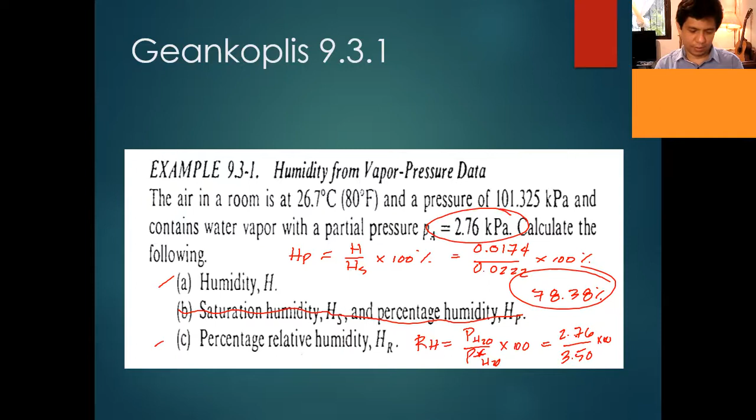So PH2O, ito yon 2.76 kPa, tapos divide natin nung 3.5. Kung tandaan nyo pa, ito yung galing steam table, tapos times 100%. So ang relative humidity is 78.86%.

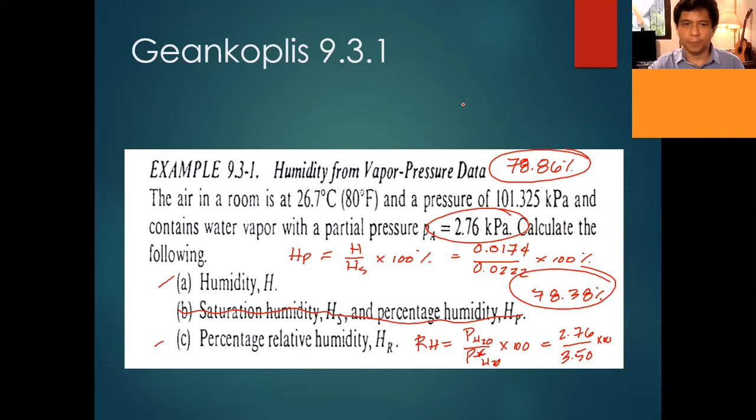Do you have any question regarding this problem, regarding the calculation of humidity and percentage relative humidity? If you don't have any question, probably it's better for you to perform the exercise on BBL. Go to BBL, meron tayong problem doon, try to answer the exercise, humidity calculations.

Kita nyo? Ano tayong exercise sa BBL? Bilisan nyo lang para mas marami tayong mag-discuss. I'll try to find the exercise in my slide. Nakita niyo na yung exercise?

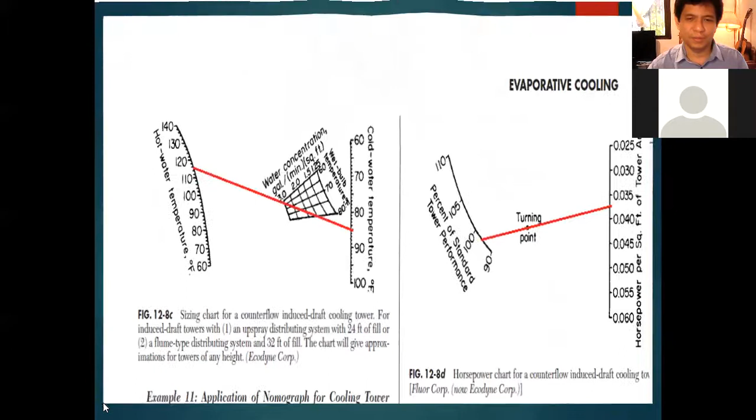Aside from dry bulb (TDB), this is the actual temperature of air. Then there's the wet bulb - if you saturate the air with water, generally the temperature will drop. That's the wet bulb temperature. And then there's another temperature, the dew point. If you recall, the dew point is the temperature at which a given air-water mixture will be saturated at constant humidity. This is known as the dew point.

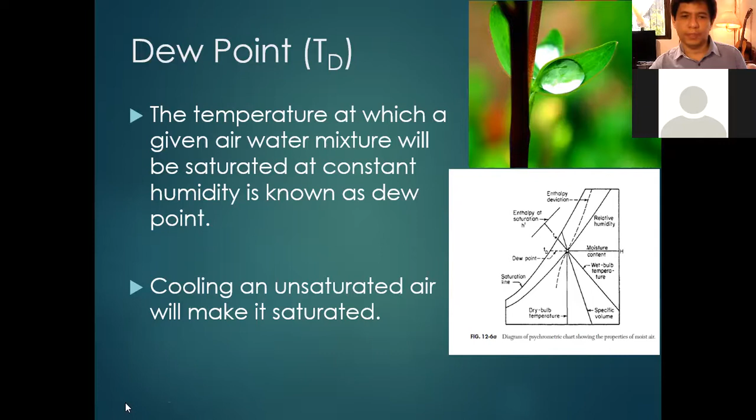Okay, let's discuss some more concepts. Next is humid heat, C sub S. C sub S is the specific heat of air with water - meaning air that contains a small amount of water. The formula for specific heat of air-water mixture in SI units is C sub S equals 1.005 kilojoules per kilogram per Kelvin. This 1.005 is the specific heat of dry air.

For example, what is the specific heat of liquid water? Isn't it 4.184? So for air, as you can imagine, the specific heat is much lower - it's just 1.005.

So plus 1.88 times H, where H is the humidity. This 1.88 is the specific heat of steam, of water vapor, with units of kilojoules per kilogram of water vapor per Kelvin. The humidity is in kilogram of water per kilogram of dry air, so the kilogram of water cancels out. This term will have the same unit as the first term - kilojoules per kilogram of dry air per Kelvin.

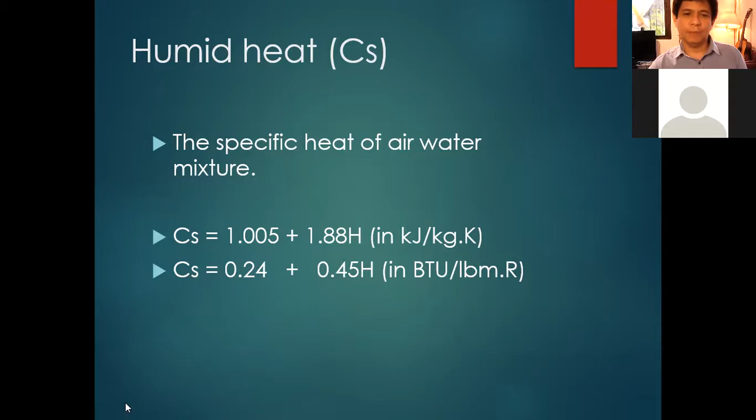Next we have the humid volume, V sub H. Humid volume is the volume in cubic feet or cubic meter of 1 pound mass or 1 kilogram of air-water mixture at 1 atmosphere at specified temperature. Basically, the unit of humid volume is cubic feet of air per pound mass of dry air, or cubic meter of air per kilogram of dry air. So this is at 1 atmosphere, at specified temperature.

So the formula for humid volume, V sub H, is 22.415 right here. If you remember this 22.4 from GenChem, this is the liters per gram mole, the 22.4 liters per mole. Here we just expanded it to 22.415. This is actually in units of cubic meter per kilogram mole.

Then this is the temperature factor. Right, as temperature increases, the volume increases, that's why we have T divided by 273. Then times 1 over 29 - the 1 here represents 1 kilogram of dry air, divided by 29, which is the molar mass of air. So kilogram divided by molar mass gives you the number of moles.

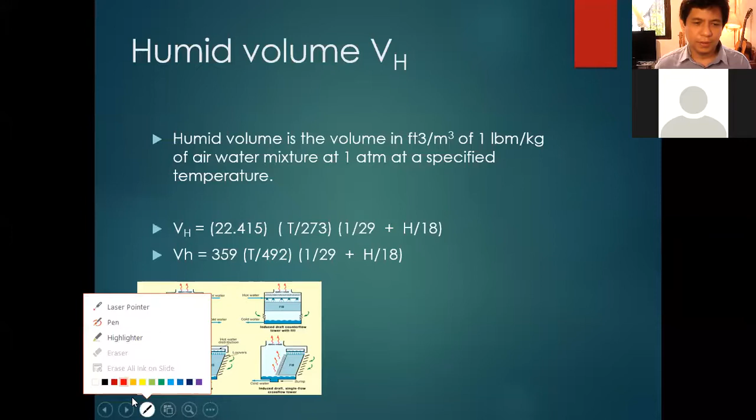Let me annotate this. This 22.415, you need to memorize it, so it should make logical sense to you. The unit of 22.415 is cubic meter per kilogram mole. So what you can do - if you still remember from GenChem, the 22.4, this is liters at STP, standard temperature and pressure, per mole. So it's the same thing, just expressed as cubic meter per kilogram mole. Do you remember this? Have you encountered this - 22.4 at STP? So this is the same as 22.415.

Then this is the temperature factor. As temperature increases, imagine the volume of gas increases as temperature increases. That's why we have T divided by 273. This 22.4 is at STP, which is 0 degrees Celsius - that's the 273. So as it increases above 273, this value increases. That's why we have this factor. But this is unitless since it's temperature over temperature, so there's no problem with the unit.

This one here is kilogram mole. Let me explain - the 1 here, that's 1 kilogram of dry air. That's why we divide it by 29, which is the molar mass of air.

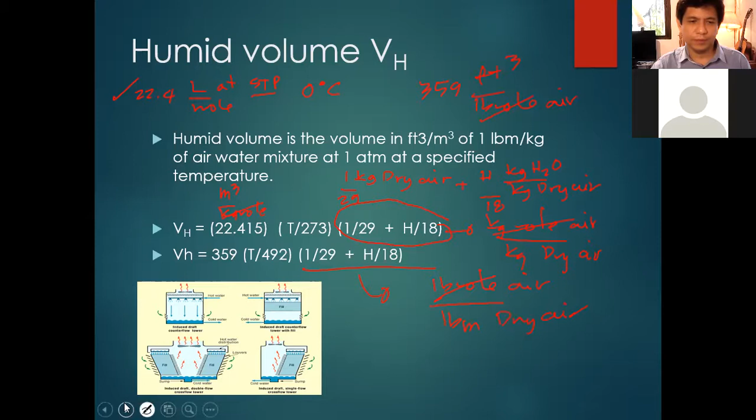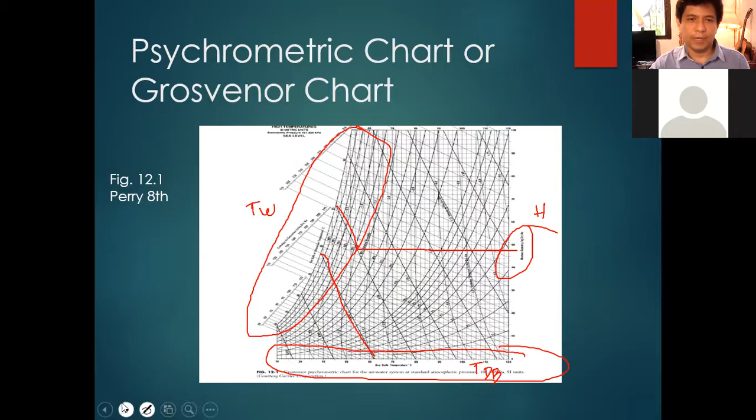Okay, you'll see this later when we solve a problem. Okay, this is the problem.

If we get disconnected, we only have 2 minutes, so reconnect to the new Zoom link. Air entering a dryer has a dry bulb temperature of 60 degrees Celsius and a dew point of 26.7 degrees Celsius. You need to determine the humidity. You can't use the formula we used earlier—well, for dew point, actually that formula would still work, but since this isn't a wet bulb problem, we're going to use the psychrometric chart to determine the humidity.

It's simple. Since dew point is given, you just draw a horizontal line at the dew point. Just locate the dew point on the wet bulb curve, then draw a horizontal line, and you'll have the humidity.

Then calculate the humid heat. For SI units, it's 1.005 plus 1.88 times H, where H is the humidity we just obtained. That's all there is to it. Then for humid volume in SI, we use 22.415 times T divided by 273, times 1 over 29 plus H divided by 18. So first, let's try to get the humidity.

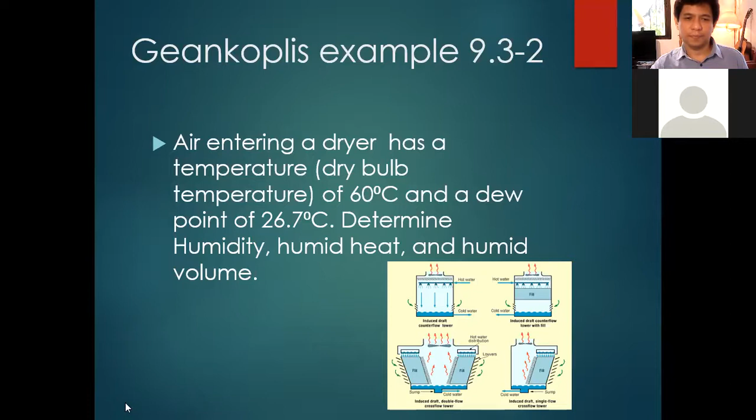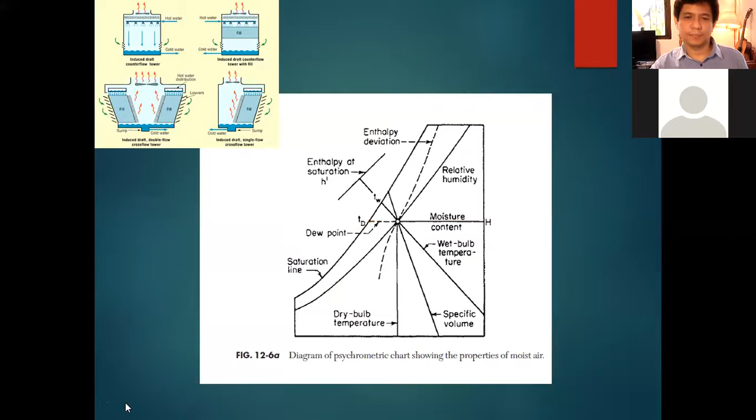Given is 26.7, so locate 26.7, then just read the humidity from there. This is approximately 22.2... so 0.02, since this is in grams, times 1,000 divided by 1,000. So it's 0.022—this is grams per kilogram dry air, so divided by 1,000, giving us 0.0222.

So the humidity is right here—that's it. This is the second 2, this is the third 2. You get it?